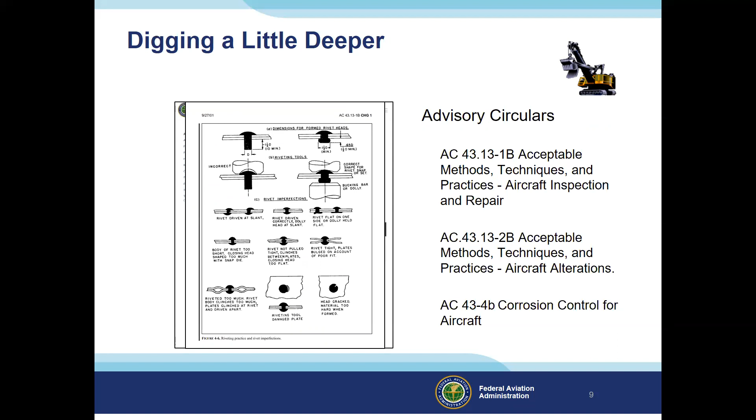The AC 20-27G is for the certification and operation of amateur-built aircraft. This is one that you'll want to be very familiar with if you're going to build an aircraft, and I'm sure many of you are already familiar with it, probably more so than I am. FAA inspectors use Order 8130.2J as we look at applications and aircraft. Chapter 15 covers amateur-built aircraft.

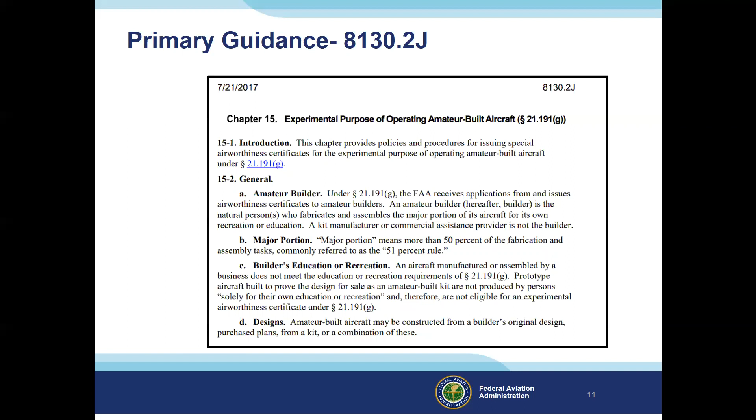Here's an excerpt, and it encourages the inspector to provide these resources to you. It mentions the advisory circular. There's also a link to the FAA's amateur-built website and your own Experimental Aircraft Association website. And I'm assuming a lot of the attendees tonight are in the EAA.

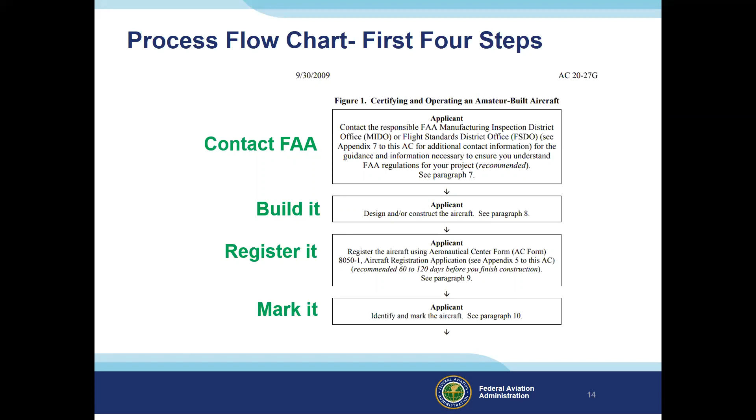So this DAR inspected the aircraft and found it was not in condition for safe operation, and so the application was denied. And the applicant was sent a detailed letter. The applicant was present during the inspection and was shown most of these discrepancies as they were found.

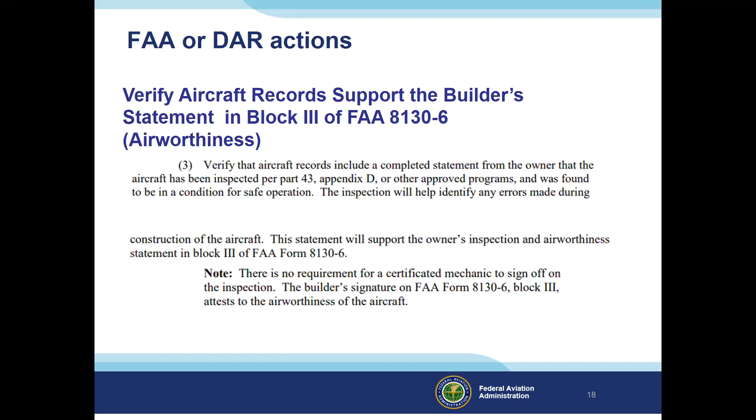We're also going to verify the aircraft record supports the builder's statement in block 3 of the application. We're going to make sure that the aircraft record has a statement from the owner that the aircraft has been inspected. This is a certification by the builder that the aircraft was inspected and found to be airworthy. So you can see how important good documentation is for this process. And there's the statement that the applicant will sign.

So at this point, the FAA or a DAR is going to inspect the aircraft to verify it is in condition for safe operation. And there is a sample checklist that can be used. It's in Appendix 1 in AC 90-89B. And the DAR that inspected this aircraft really should be commended. And our DARs do a great job. And he probably saved this aircraft builder's life, as you see some of these discrepancies.

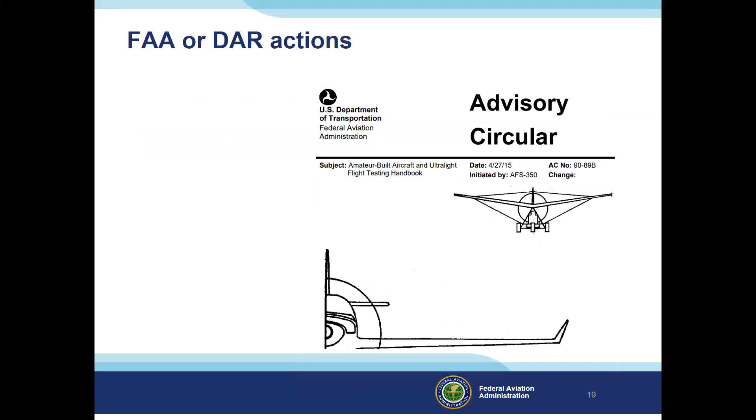So let's review hazard and risk before we look at these discrepancies. Once we see a hazard, we can try to determine the level of risk the hazard presents to an operation. Risk is the future impact of a hazard that is not controlled or eliminated. The level of risk is a combination of likelihood and severity. Likelihood is the chance of an accident happening from the hazard. Severity is the level of injury or loss that will occur when the accident happens.

Once you know the level of risk, it all comes down to how much risk you are willing to accept. If you cannot accept the level of risk, you must take mitigating actions to eliminate or control the risk. So let's keep these concepts in mind as we look at the various hazards that were found on this aircraft. There is the risk assessment matrix with likelihood on the left side and severity across the top. And if something is probable that it will happen and the results of it happening are critical or catastrophic, then that would be a high risk.

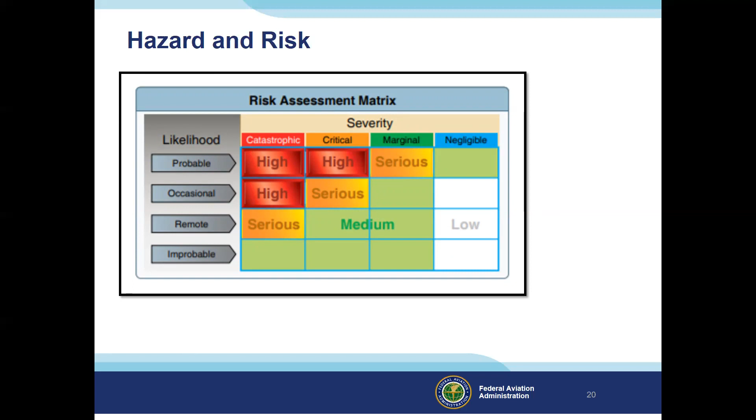So here is our first discrepancy. The elevator control tube, located at the aft end of the cabin removable bulkhead in the floor area, is missing the cotter pin in the castellated nut. And this is definitely a hazard. This is a high risk because the nut is probably going to fall off at some point. And at some point, the bolt is probably going to come out. And once that happens, elevator control will be lost. And as you know, these types of failures usually result in a catastrophe and death.

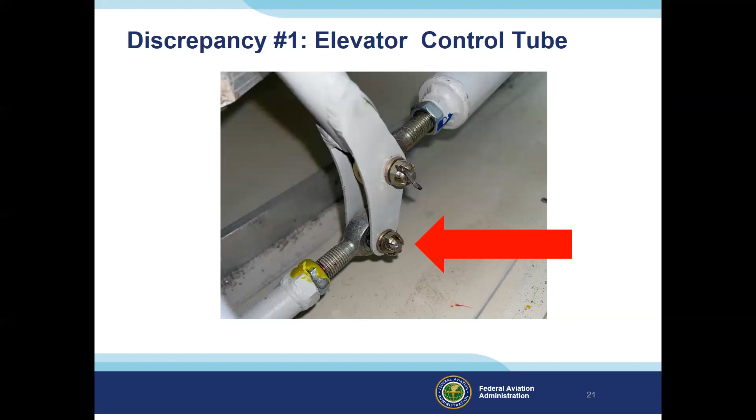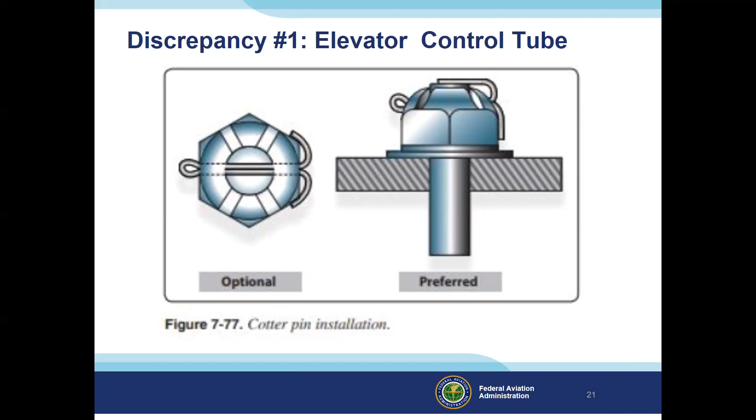And let's not forget the acceptable methods of installing cotter pins, and that can be found in those references that we looked at earlier. It is a checklist item, if the checklist had been followed: flight control bolts and pins for safety.

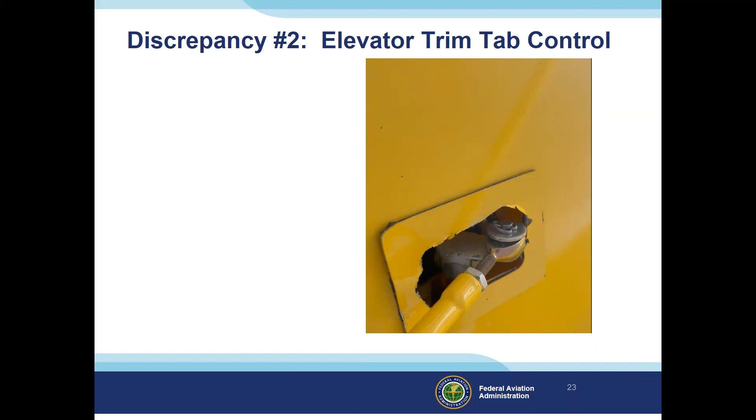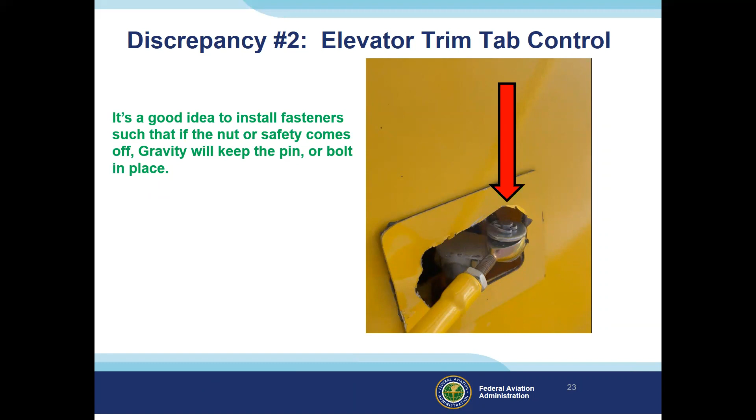So this is probably an example of failure to follow the manufacturer's recommendations. Also, when you're installing these critical components and fasteners, it's always a good idea to install the fastener such that if the nut or the safety comes off, gravity will keep the pin or the bolt in place. And that was also on the checklist: trim tabs and rod ends for attachment.

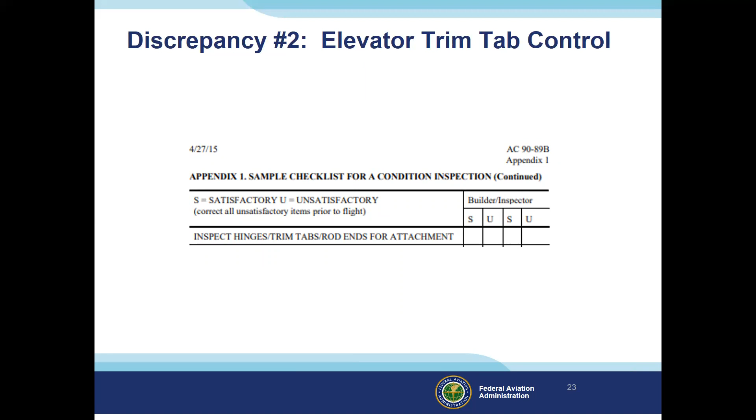Discrepancy number 3 is the right flap torque tube. And the bolt is distorted and bent. And there was material removed from the head of the bolt, which is riding on a welded flange. And this same flange has been misdrilled at a different clocking location, which may affect the integrity of the tube collar's intended strength. I don't know how they even got the bolt through this hole as offset as those holes are. It almost looks like the bolt had to be bent to get it through.

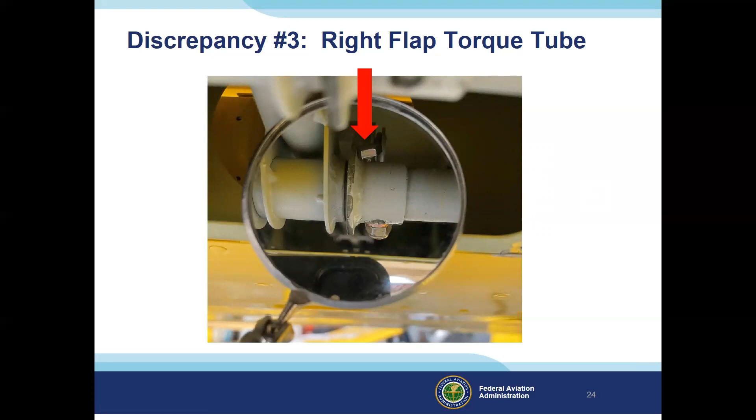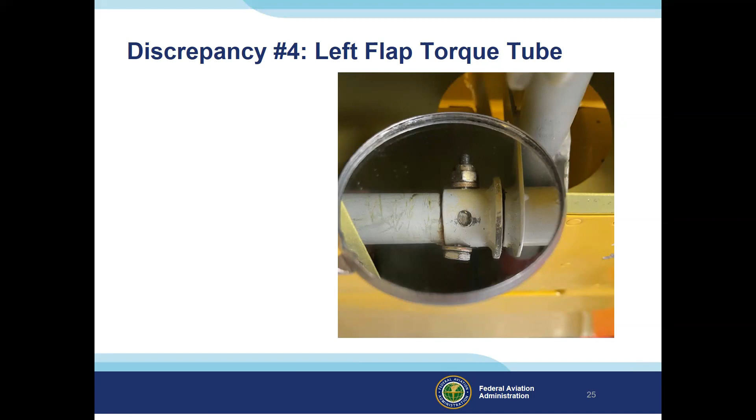And believe it or not, the left flap torque tube looked the same way. It's really important to use a center punch when you're drilling holes. And here's a picture from the National Archives, World War II era.

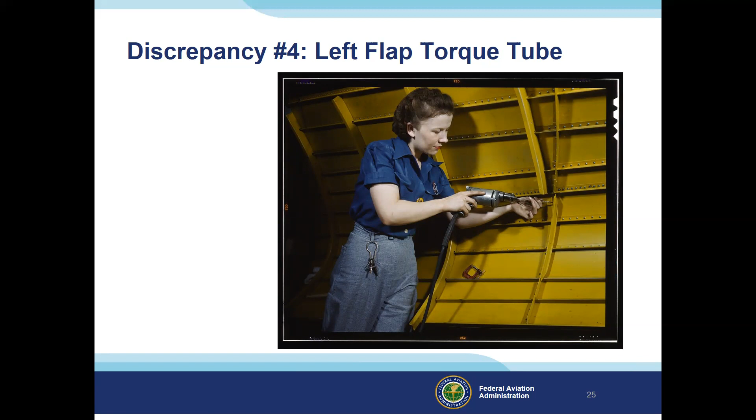Our next discrepancy is related to flaps. When lowering the flaps with the handle, the flaps do not move symmetrically. The right flap actuation occurred before the left side began to move. Additionally, while viewing the flap cables, the cable tension is not equal and it appears not to have tension on either cable. The cable to pulley engagement does not occur until the flap handle displacement begins.

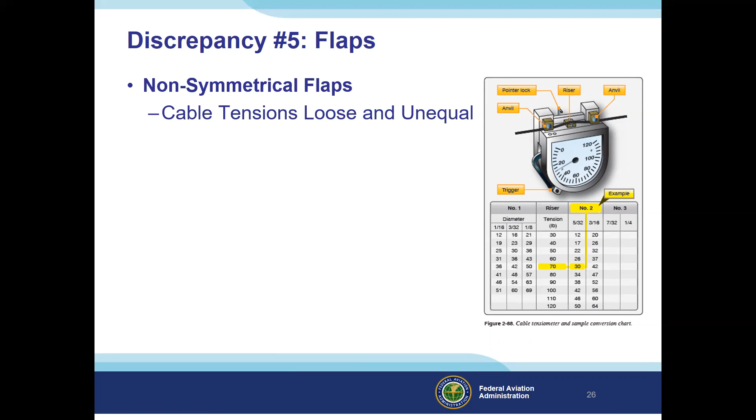All cables have a specification for proper tension, and this is critical for flight controls. And that's just a picture of a tensiometer. Next discrepancy was there were screws chafing the aileron cables. The left and right wing fairing strip attachment screws were too long. I don't have a picture of that.

Discrepancy number 7, there was a foreign object in the wing. Inside the left wing lower access panel, there was a portable work light found. Now, tool control procedures are very important. Some ways to prevent foreign object damages and hazards are keeping the area tidy, shadowing your toolboxes so that you can easily see if something is missing,

do a post-work inventory of your tools and equipment, and lastly, inspect the area before you install the panel. These simple things could have prevented this, because when you have a foreign object floating around, obviously it can jam a flight control or something of that nature.

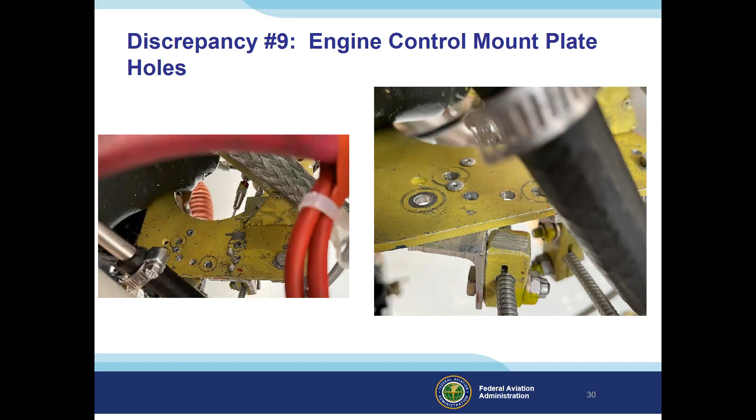Certainly, the applicant could probably have heard this foreign object just as the DAR could hear it. In fact, almost all of these discrepancies were pretty easy to observe. Discrepancy number 9, engine control mount plate holes. They look like Swiss cheese. And the spacing is less than 1 time the diameter, which might lead to cracking between the holes. Advisory Circular 43.13 provides details on rivet hole spacing.

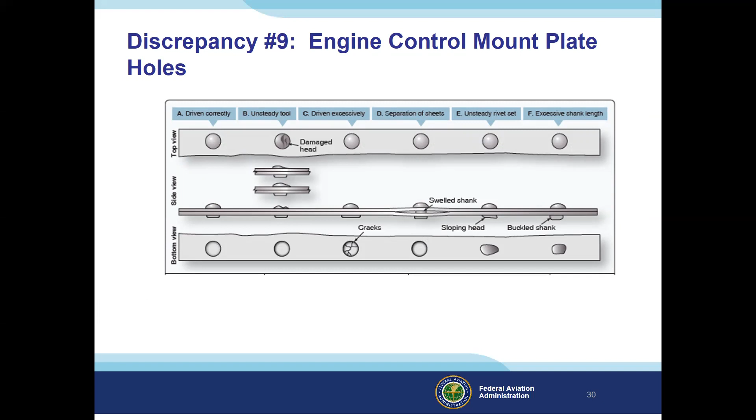I think this is actually an excerpt from one of those handbooks I showed you on FAA.gov. Some of the different problems with rivets. And there's information in there on rivet spacing. If we look closely at these specifications, we'll probably see more problems here than just the spacing.

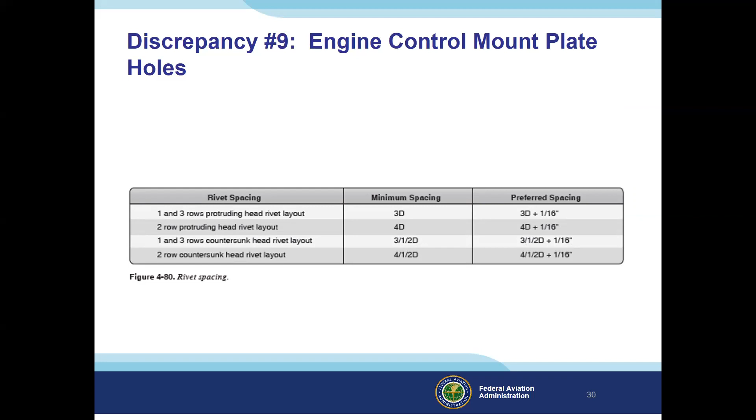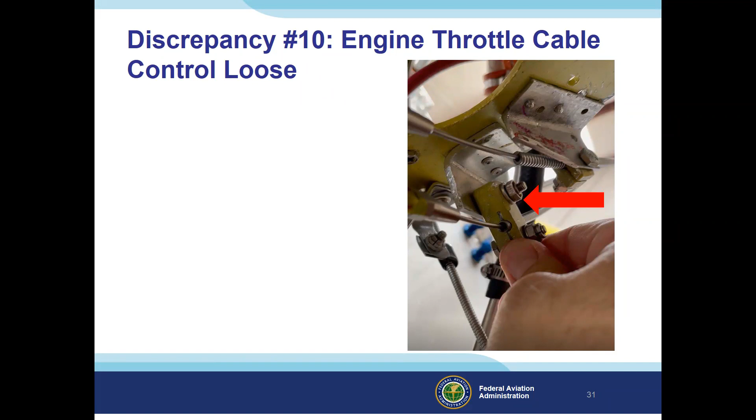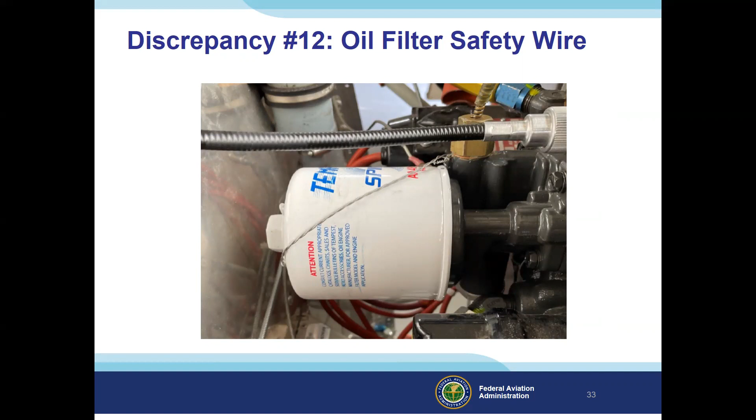So if the oil filter loosens up to the point where the engine oil leaks out, it can get really expensive. And it's also very dangerous when the engine seizes up, especially just after takeoff. Sometimes the phase of flight that something occurs can be a big factor on the severity of the injury or loss. There's many examples on how to properly safety wire fasteners.

So I'm going to show you a 57-second video on safety wire. I think you'll find it interesting. Hopefully the internet signal will be strong enough to do this.

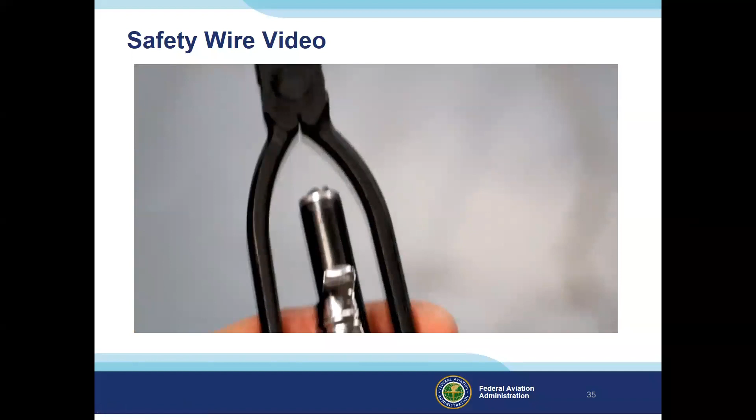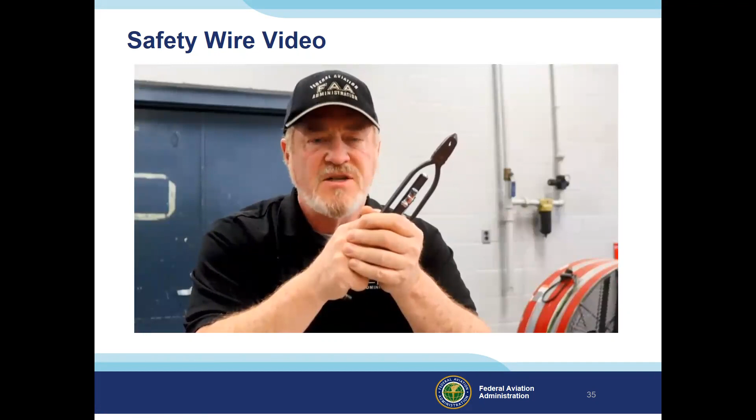I'm here today at the Tennessee College of Applied Technology Aviation Campus at Memphis, Tennessee to talk about safety wiring. These are safety wire pliers, and they're used by mechanics to ensure that the bolts in our aircraft are safety wired properly. So what do we look for when we pre-flight our aircraft in regards to safety wire? We'll talk about that on 57 Seconds to Safer Flying. Safety wire is used to keep a bolt from backing out due to vibration.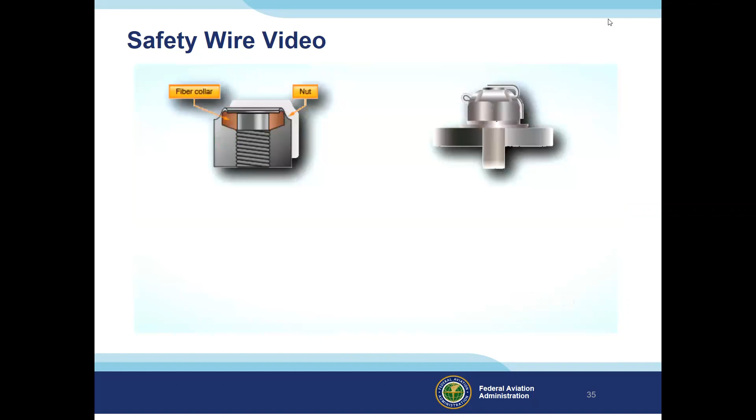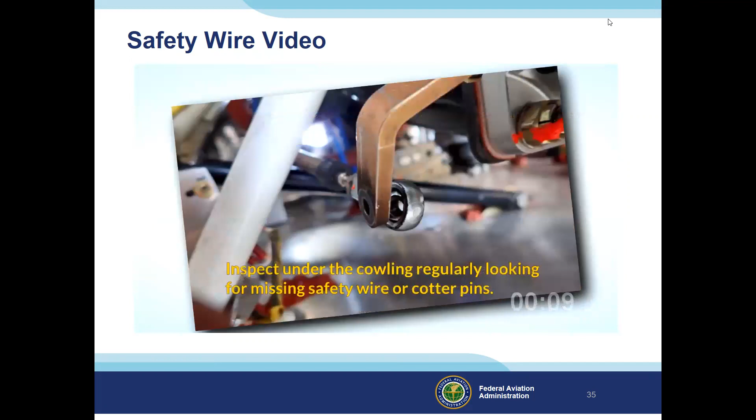Learn to tell the difference between a good safety wire job and a poor one. Lock nuts, castle nuts, turnbuckles, and cotter pins all help hold your airplane together. A Glasair crash landed in Arizona 30 minutes into the flight after the engine lost power. It turns out the cotter pin, connecting bolt, washers, and castellated nut were missing from the linkage to the throttle arm. It's not always easy checking them all. So learn by doing a walk around with your mechanic.

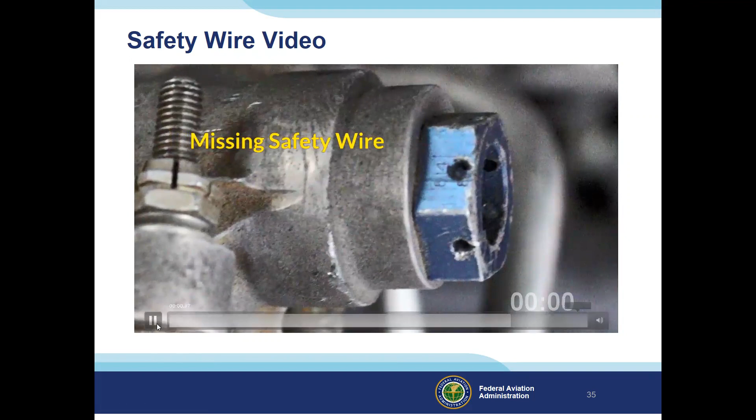So get familiar with where the safety wire is on your aircraft and make that part of your pre-flight inspection. For the FAA safety team, I'm Phil Dixon.

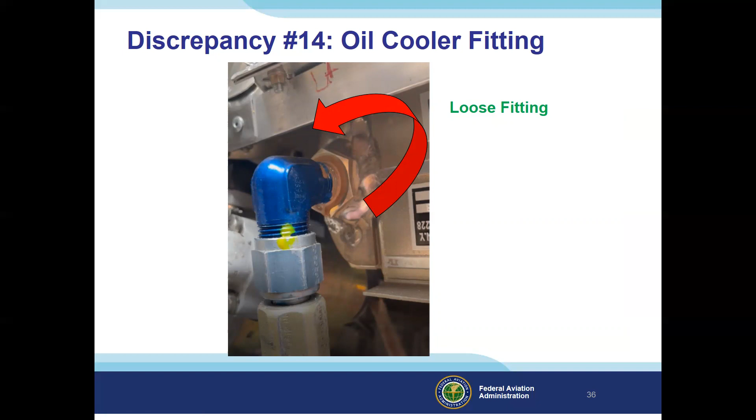All right, hopefully that came through. The next discrepancy on the list was the oil cooler fitting was loose, just finger tight. Discrepancy number 15 is the engine tachometer cable was loose. Now the risk here is probably low because this would probably result in an indication problem and not a power loss situation. So as we think of the hazards and the risk assessment, some of them obviously have a higher risk than others.

Discrepancy 16, the engine shroud upper side has a misaligned hole with no fastener installed. And as we know, engine shrouds and baffles are important for engine cooling.

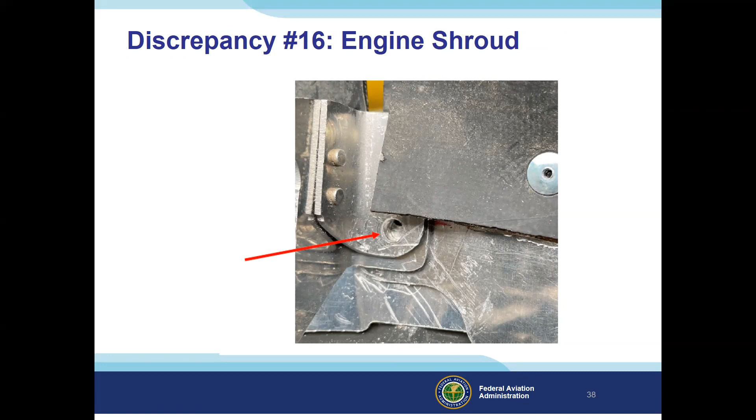And here the starter solenoid cable was loose. It easily moved with hand pressure, and this was demonstrated to the applicant. If you think of the hazard and risk process, this hazard might be a lower risk because the problem will probably occur during engine start on the ground, which is less severe than something that occurs in flight.

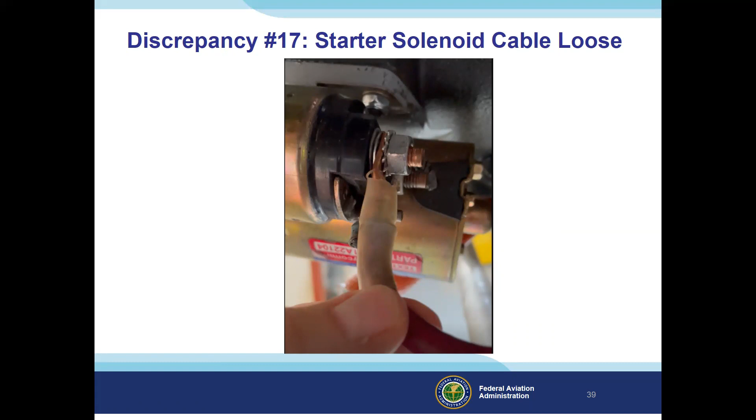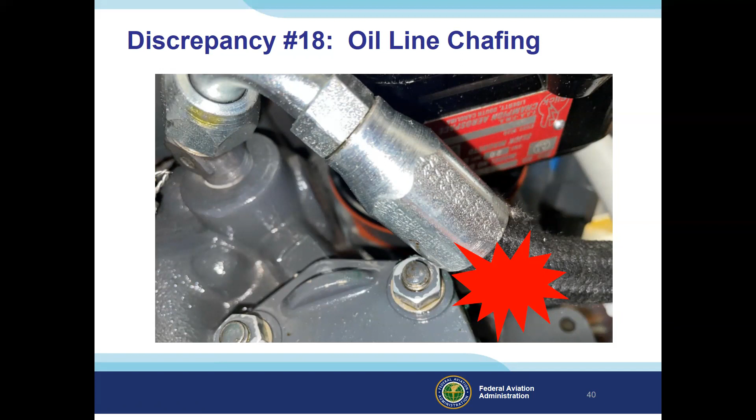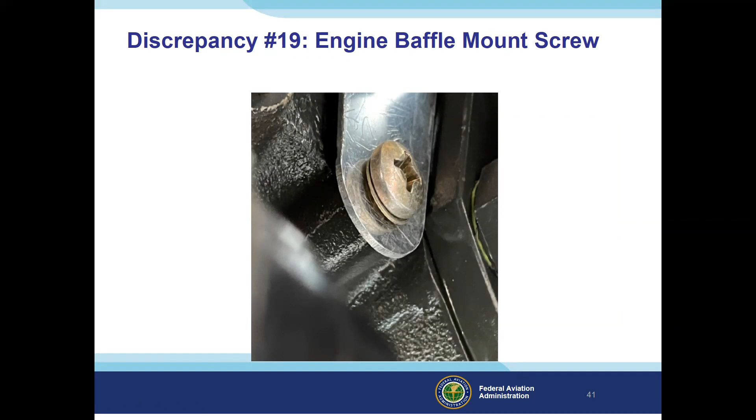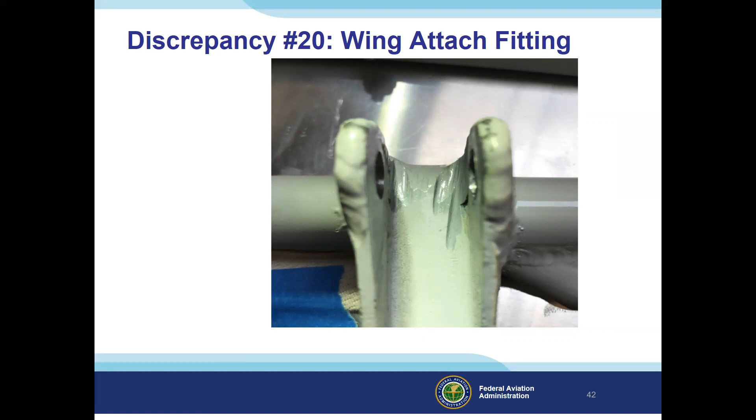The builder also did not have adequate documentation to show compliance with the 51% rule. The documentation has to support the requirements of the regulation and the FAA order, which is used to ascertain what was fabricated, assembled, and inspected, who performed these actions, the date the activity was performed, where the activity was performed, the methods used, and any commercial assistance or educational assistance that was used.

So let's summarize and review. Today, we reviewed hazards and risk. We looked at where to find resources for builders. We saw the missing cotter pin on the castellated nut, and this would cause a loss of control. We saw where incorrect hardware was used, a pin and a cotter pin instead of a bolt and a lock nut. We saw a lot of things were safety wired improperly. We saw the loose engine control clamp, which could cause a loss of engine power.